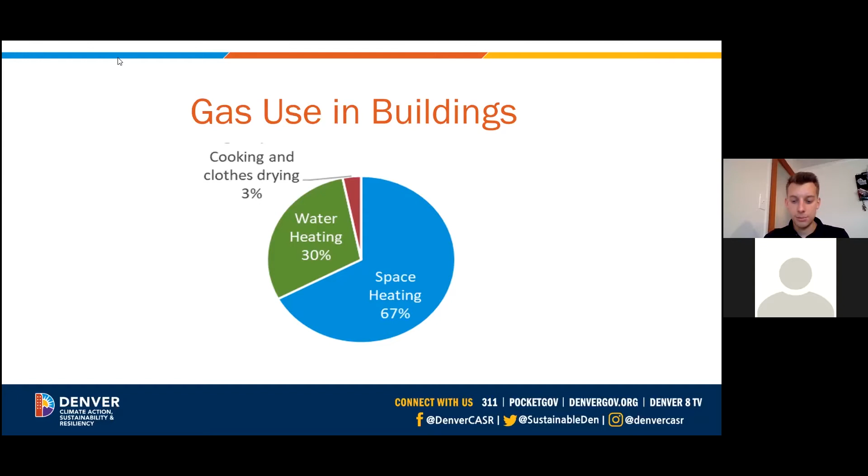When we talk about building electrification, what we found in our plan is actually it's a really high impact climate strategy. First of all, natural gas is actually methane. So methane is the primary component of natural gas, and it's around 80 times more potent than carbon dioxide over like a 20-year time frame. So making meaningful reductions in methane today has really, really high impact climate benefits, especially if we're able to reduce methane leaks throughout distribution and transportation.

And we also found that Xcel Energy has significant goals to decarbonize its electric mix. So currently the grid is around 30% or so renewable, and by 2030, their grid is going to be 80% renewable, and they have a 100% renewable goal by 2050. And Denver is actually looking to further accelerate that timeline. So we have a goal of being 100% renewable city by 2030. So 2030 is well within the lifetime of any heat pump installed today, assuming it can run for 15 or 20 years. It is going to be operating on a primarily renewable powered grid.

And I already see a question or a hand raised. Sorry, was that you, Elizabeth?

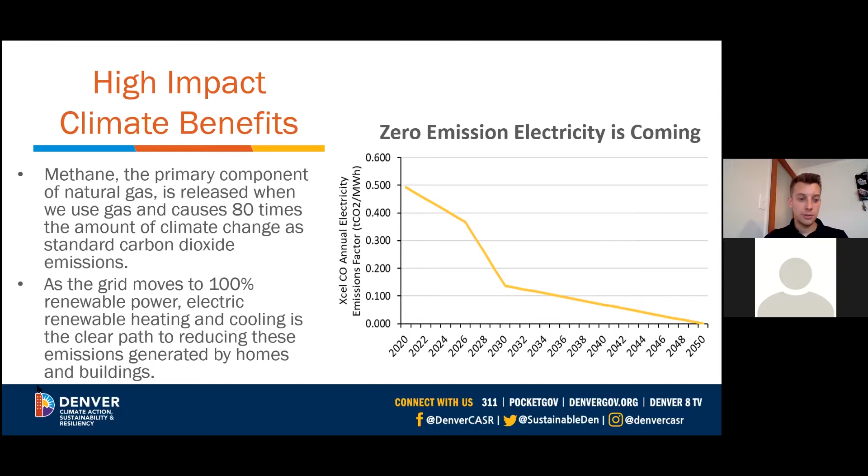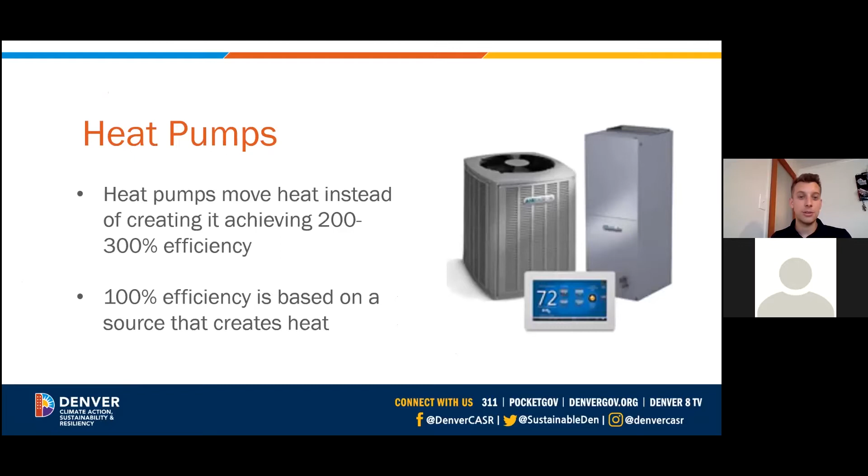And then the third reason that building electrification has such a huge climate benefit is because we're going from something like 90% efficient furnaces and boilers to heat pumps, which are 200 to 300% efficient in our climate zone. And the reason they're able to be more than 100% efficient is not magic. It's because they're moving heat rather than generating it. So rather than burning something or heating something up directly, every unit of energy put into a heat pump is able to effectively move 2 to 3 units of energy for heating needs.

One of our interesting findings pertaining to Denver and likely other communities in Colorado is that not everyone has air conditioning today. We found that approximately 30% of Denver homes do not have air conditioning, and this is likely to be even higher in mountain communities. And we see that our climate is really warming up. We saw that just last week. We had a pretty uncharacteristic heat wave for Colorado, and for Denver, it was around 90 degrees in June. And I think a lot of us, including myself, wish we had cooling. Obviously heat pumps are able to provide both heating and cooling to a space. That's why we're able to leverage that benefit.

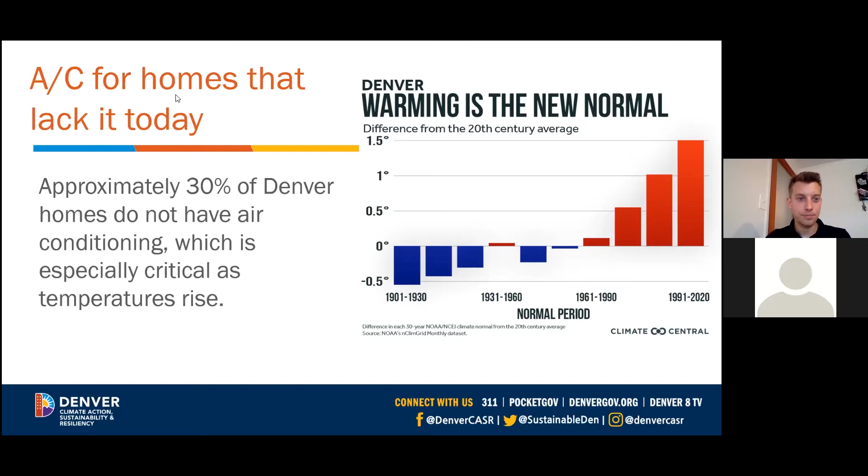There's also significant equity findings in the plan. What we were able to come across is when we've done programs in Denver, around 30% of low-income homes, the gas equipment actually fails carbon monoxide tests. And another data set we just received from the Colorado Energy Office and the Energy Resource Center, which is a local provider of energy efficiency in the income qualified space here locally, found that something like 95% of income qualified homes in Denver do not have carbon monoxide detectors or functional carbon monoxide detectors, and around 40% have excessive carbon monoxide levels. So pretty significant findings, especially when you compare that to some of the much lower rates in market rate homes. So around 5% of gas equipment in market rate homes also fails carbon monoxide tests, but that's at a rate of six times less than low income homes.

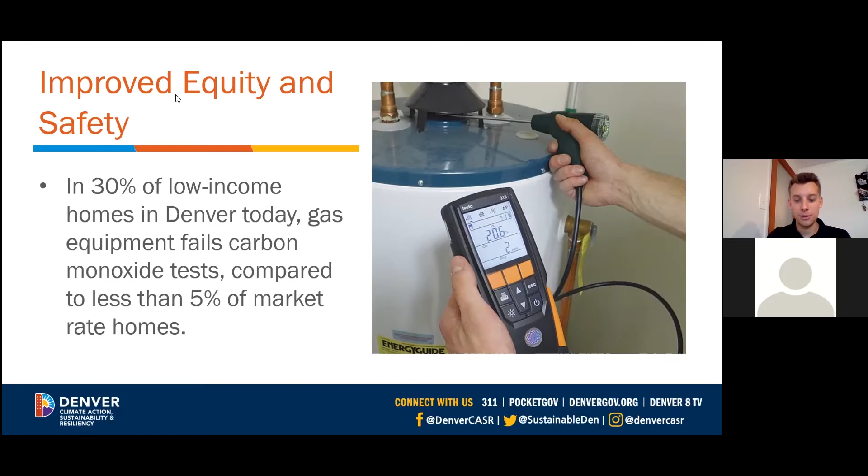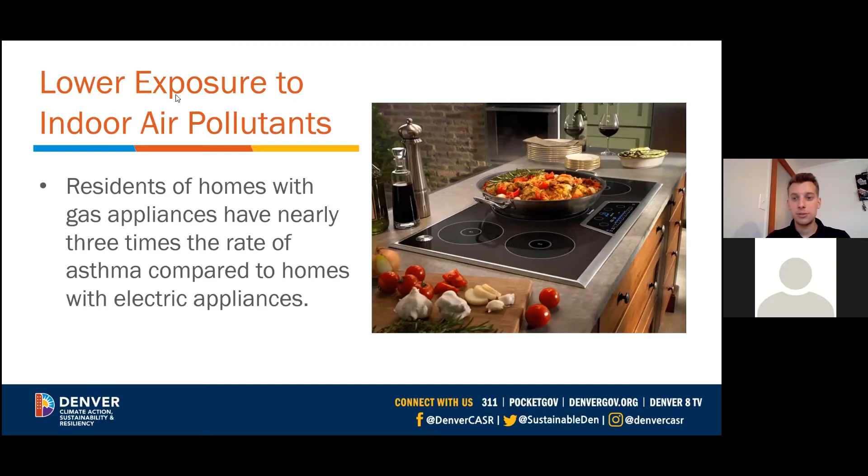There's a growing body of research discussing the negative indoor air quality effects of gas combustion. A number of statistics show residents of homes with gas appliances have nearly 3 times the rate of asthma compared to homes with electric appliances, and kids especially are impacted by homes that use gas stoves for cooking. So while it's not a huge climate benefit for us to address cooking, it is something we want to think about when we want to improve exposure levels or other public health metrics in Denver.

What our analysis really found, and we'll dig into this in detail, is that at end of life, so when a furnace or air conditioning compressor or hot water heater fails, most homes and buildings can replace it with an electric equivalent with a similar cost for both installation and operation as they would pay with a new gas system. So that's really our intervention point, is when a system is already failing and the homeowner or building owner is already looking to replace it with something new. That's when a heat pump can be very, very cost effective.

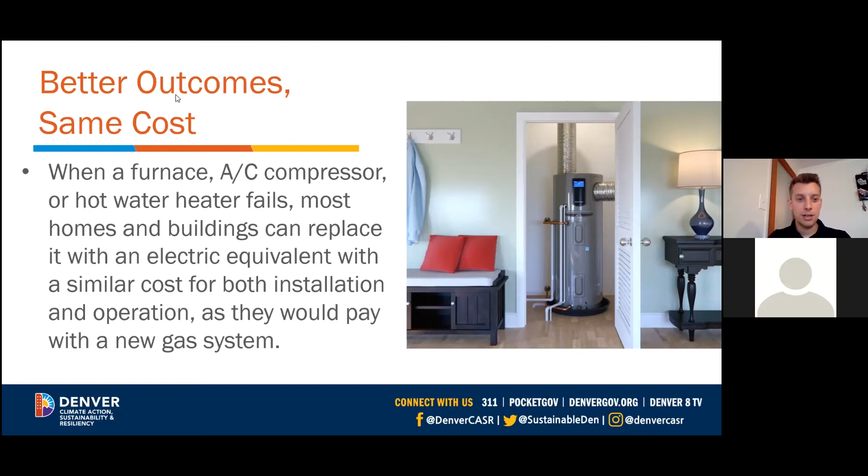We also worked with Xcel Energy to understand the grid impacts of building electrification in Denver. Xcel Energy was able to share some anonymized and aggregated electric feeder level data, as well as some gas data and data around our downtown steam system. So layering all that over to understand what happens when we electrify residential buildings, multifamily buildings, downtown offices. What does that do to our electric system? And what we found is that the grid today is actually built out to withstand such a high air conditioning load that we have a really long runway before the winter peak starts to look like the summer peak. And winter heating needs today can very easily shift to being powered by renewable electricity.

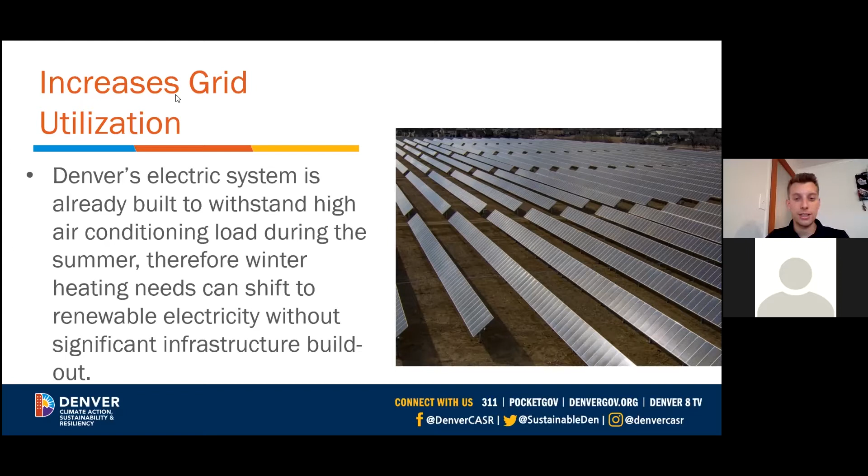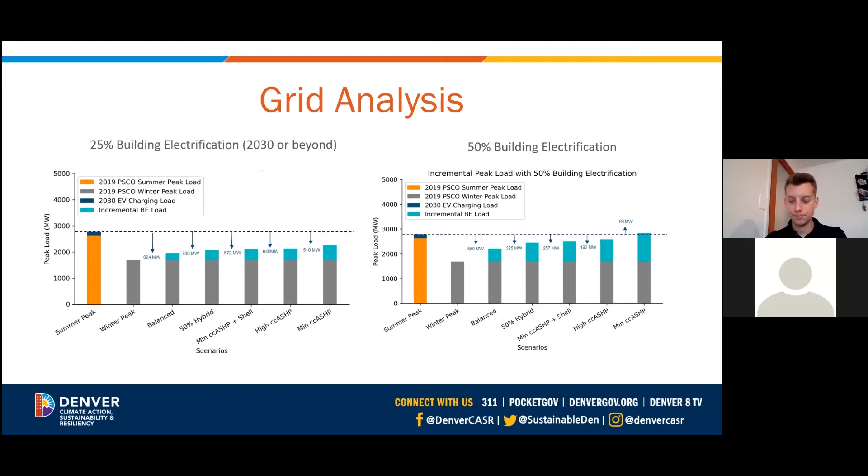When we talk about heat pumps, they're really not that new. They can seem very new to us, but they've been used in our refrigerators since the 1800s. So pretty established technology. And for space and water heating, they've been used in Asia and Europe for decades now and are extremely common there, things like VRF systems and ductless heat pumps as well.

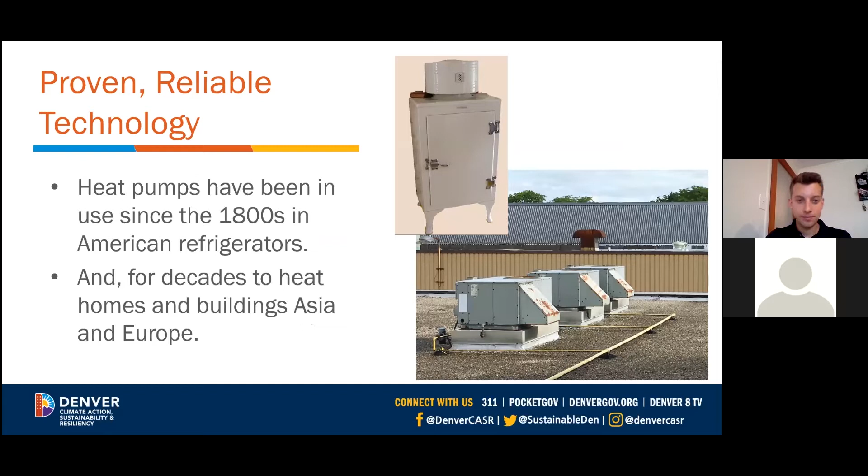Finally, what we found in our plan is that this is really Denver's opportunity to lead. A lot of cities, businesses, states and countries are looking to transition their energy uses away from fossil fuels and towards renewable technology. By addressing this now, Denver is really in a position where we can lead and be thoughtful about the policy and deliver all the benefits we want to with heat pumps in an equitable manner. That way we don't have to play catch up later and do early replacement programs. By being proactive now, we're able to be really successful going forward.

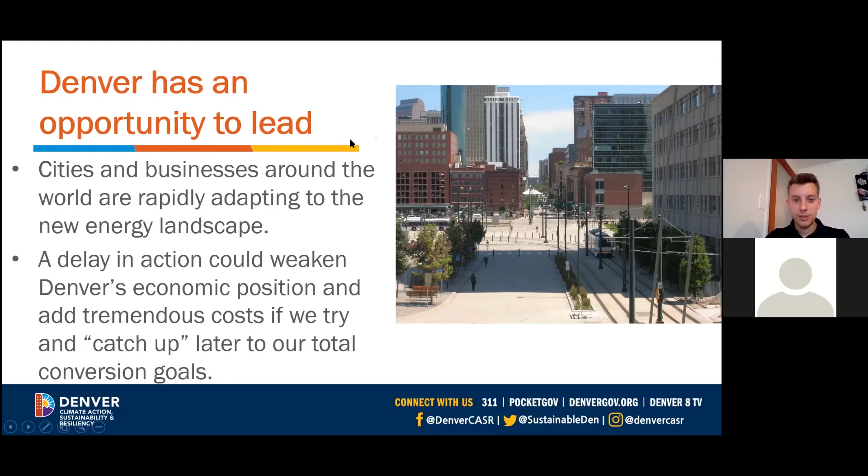One of the things we looked at in our plan was also trying to understand how building electrification compares to other options to decarbonize our fossil gas emissions. So the question often comes up, why do we electrify? Why don't we just decarbonize what's in the pipeline? There are a number of options to do that.

The first is biogas. The idea there is we're reclaiming methane from things like landfills, manure fields, coal beds, anaerobic digesters at wastewater treatment plants. While that is a really good climate strategy because we're claiming some of that fugitive methane and doing something useful with it, the challenge is that locally in Colorado, estimates say we could probably only meet around 5 to 10% of the natural gas supply with biogas.

The second option is hydrogen. This is the idea where we're creating green hydrogen, hopefully using excess renewables on the grid, and putting that into the pipeline to be blended with the methane there. Studies have established that we can mix around up to 7% of the pipeline mix before we start having issues. Much above that, and we might have to start replacing pipes because hydrogen molecules are much smaller than methane molecules, so they might leak out of pipe junctions. And we might have to change out the actual appliances. Furnaces, boilers, and stoves are all not really designed to combust hydrogen currently.

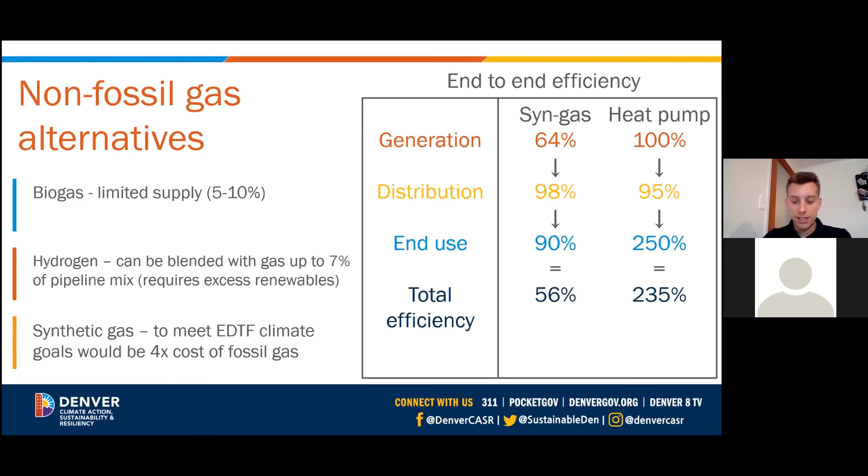I'll dive into the electrification typologies, which is the techno-economic analysis component of the plan. But first, I just want to go over some key considerations.

The second key consideration we found is that avoiding electric resistance can save both on capital and operating costs, and this is really important to keep in mind. From the capital cost perspective, if we install a heat pump with electric resistance units, it's possible that electrical upgrades are triggered at that building or home, and those can be very expensive. On operating costs, avoiding electric resistance as much as possible is really key to making the numbers work.

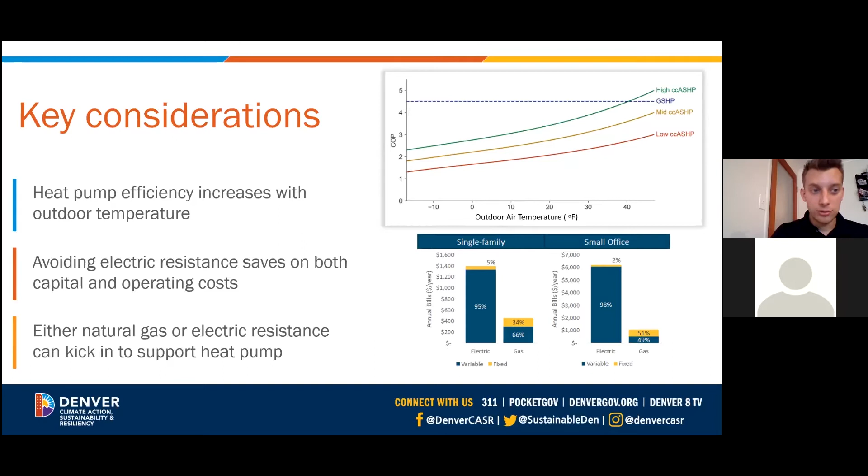That dynamic is very different on the gas bills. Around half the bill is how much a small office would pay to get gas delivered, dollars per therm delivered, and half is how much they pay to be connected to the gas system monthly. It's similar for single family homes—we pay around $12 a month to be connected to the gas system, and in commercial spaces it's around $45 a month, regardless of the size of the space. That's why we see instances where full electrification has really good operating costs, because we're assuming we're able to fully electrify the building and remove that gas fixed charge of being connected to the gas system.

With that, I'll jump into space heating.

We found that four space heating typologies represent around 70% of commercial multifamily buildings in Denver, and a significant amount of residential space as well. Typology one is just a standard furnace system. The second typology is rooftop units. The third is packaged terminal air conditioning units. And the fourth is boilers.

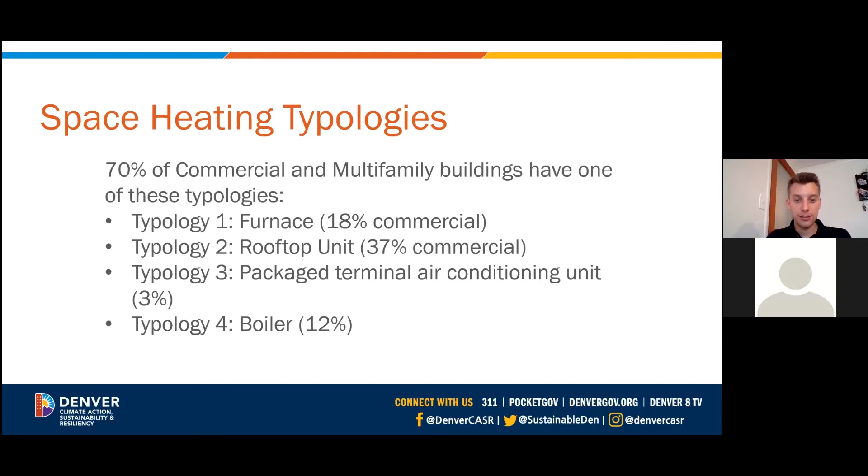The first typology is furnaces—this is probably what we're most familiar with, what we're likely to have at our home. There are a number of options to fully or partially electrify these systems. Full electrification can be done with both ducted and ductless systems. The graphic on the left is a ductless system where there's no ducts, just an outdoor unit and an indoor unit with refrigerant piping in between. The outdoor unit is able to find heat in the air, just like your refrigerator, down to some very cold temperatures, and bring that inside to the refrigerant and disperse it in the space.

Full electrification would involve using an electric resistance unit of some sort for backup heating needs. Partial electrification would be if you retain your existing fossil fuel system for those few hours of the year where it's very cold—that could be a hydronic baseboard, or it could be a forced air furnace as well.

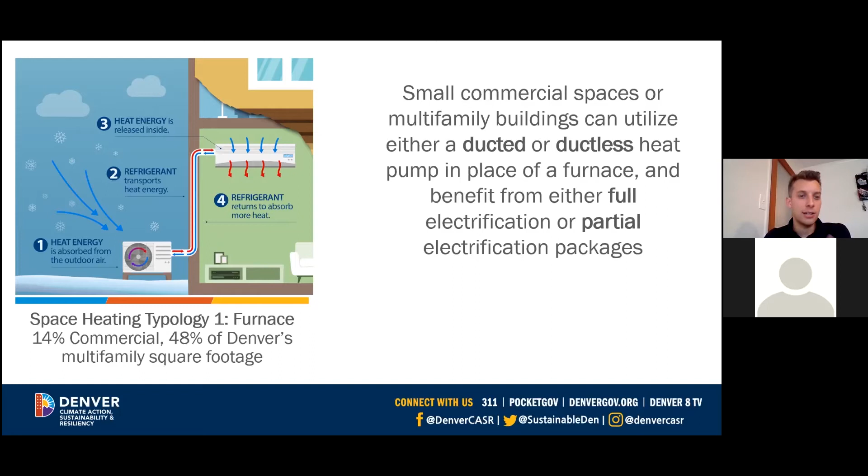Ducted systems are similar to the image on the left, where you have an outdoor unit and an indoor unit, but the indoor unit disperses that heat through your ducts, utilizing that existing infrastructure. Ducted systems tend to be a little less efficient, just because you have higher fan power and might have some losses through the ducts.

However, energy bills stay about the same. This is due to the fact that we're able to really make the most of that heat pump efficiency when it's milder out, above 20 degrees Fahrenheit, and below that make use of the really cost-effective gas right now.

Using a temperature change point around 20 degrees Fahrenheit gives us around a 70% gas reduction for space heating for that site. So pretty significant, given we're not making any impacts to energy bills. We're addressing a lot of emissions right there.

The mini split or ductless system is able to utilize a slightly lower temperature, around 15 degrees Fahrenheit, and the installation costs are at cost parity to a gas system or a little bit higher. We do see energy bill reductions because ductless systems can be that much more efficient. And because we're using a lower temperature set point of 15 degrees versus 20, we're able to address around 82% of the gas reduction or of the gas used on site.

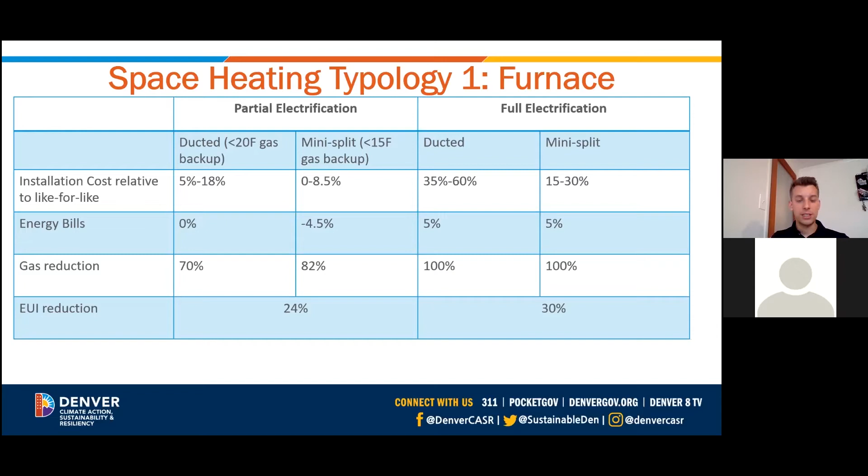The second space heating typology is rooftop units. This is something really common in medium-sized commercial spaces throughout Denver. And luckily for us, manufacturers have an off-the-shelf option that can do both full and partial electrification. The partial electrification option is a heat pump-based unit that has a small gas furnace that can kick in to support that heat pump if needed. And the full electrification option would have a heat pump and some electric resistance units in there as well.

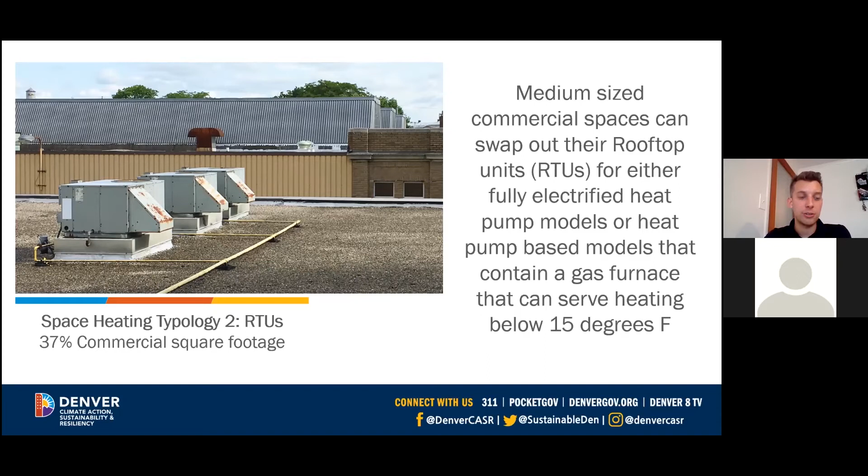For rooftop units, we see really great economics on partial electrification. They can cost about the same or up to around 12% more. And we're able to keep energy bills the same on an annual basis. We're able to address around 81% of gas use for space heating at that site, assuming a 15 Fahrenheit switch point. And again, an EUI reduction of around 24%.

Full electrification, this is where we see some more expenses compared to a one-for-one gas project, something like 50 to 72% higher. We do see energy bills go down, and that's because with full electrification, we're able to avoid that gas fixed charge, like the charge to be connected to the gas system, and therefore lower operating costs that much. Again, with full electrification, we're always addressing 100% of gas used for that space heating or water heating type. And the EUI reduction, again, gets a little bit of a bump, 30%. So pretty significant. And that's due to how many heating hours we have in Denver.

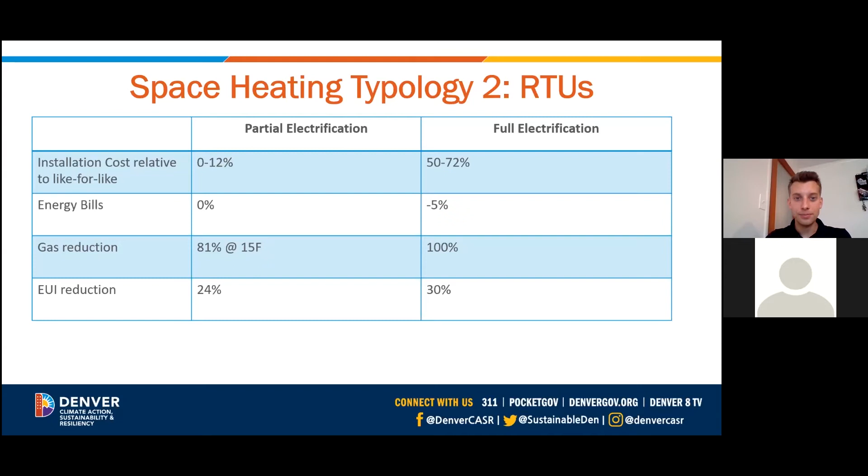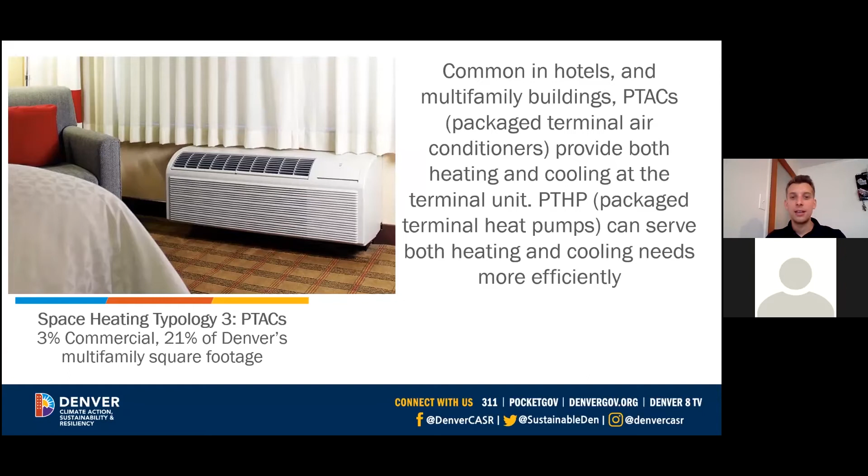The third space heating typology is packaged terminal air conditioner units. So you're probably familiar with these. You've probably seen them in hotels. And they can provide both heating and cooling to a space.

For PTACs, we looked at both partial and full electrification, and we see some bigger impacts around installation costs. This isn't always the case. It can be done cost effectively, but we found on average it may be a more complex project. For partial electrification, we do see energy bills go down, and for full electrification, we see them go up just because that electric resistance unit has to run.

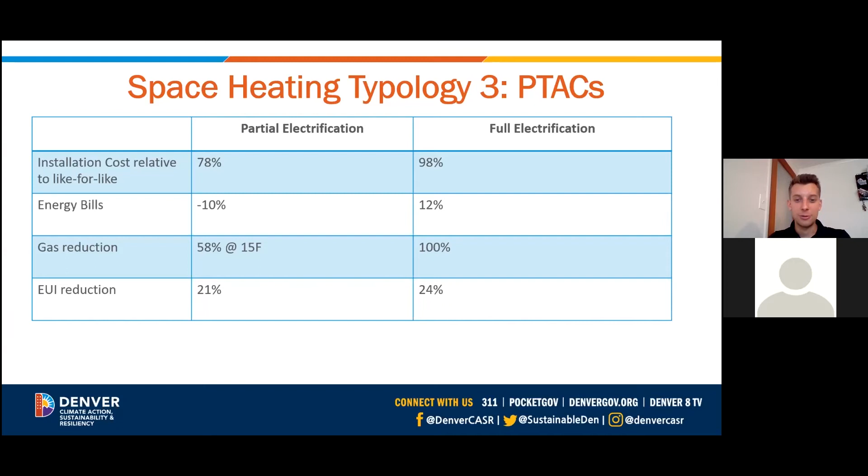With partial electrification, we're able to address around 58% of gas use on site, assuming a 15 Fahrenheit temperature switch point. And with full electrification, we're able to address 100% of gas used on site. EUI reductions are a little bit more modest, but still pretty significant: 21% reduction for partial electrification and 24% for full electrification.

Finally, boilers. This is really what we would see in some of our largest commercial buildings where they have a dedicated mechanical penthouse with a chiller and boiler. And the options there are really to replace the boiler with an electric boiler. And that can prove a little bit costly, as you'll see.

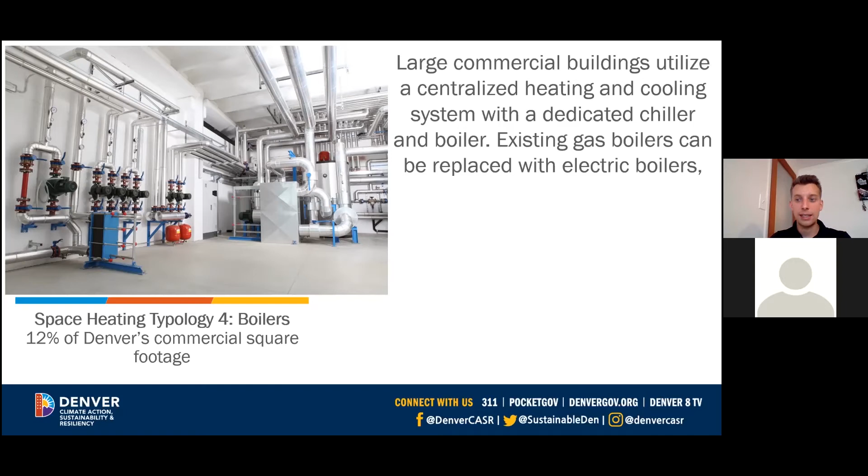For boilers, we only model full electrification. There are partial electrification options for large commercial buildings, but our team didn't feel comfortable modeling that today.

The installation costs are around 66% higher compared to a one-for-one gas project, and we see a decent bump in energy bills, around 19% increase. A lot of that is because we're departing from heat pump technology here, with all its efficiencies of 200 to 300%, and instead utilizing a lot more electric resistance.

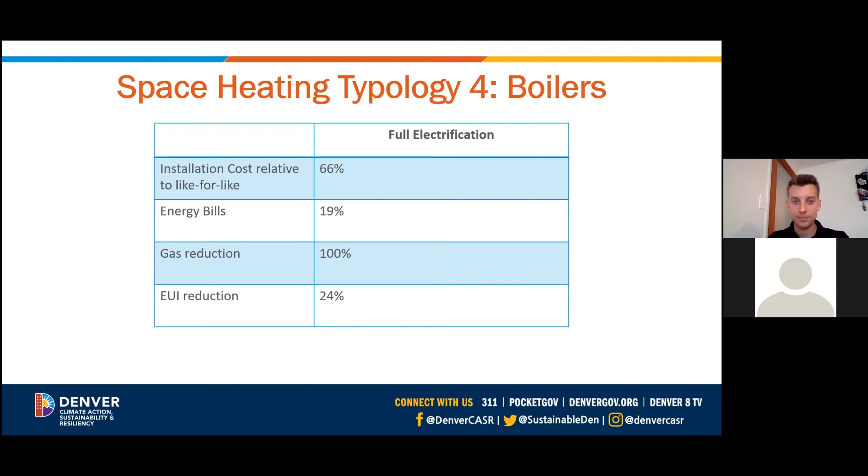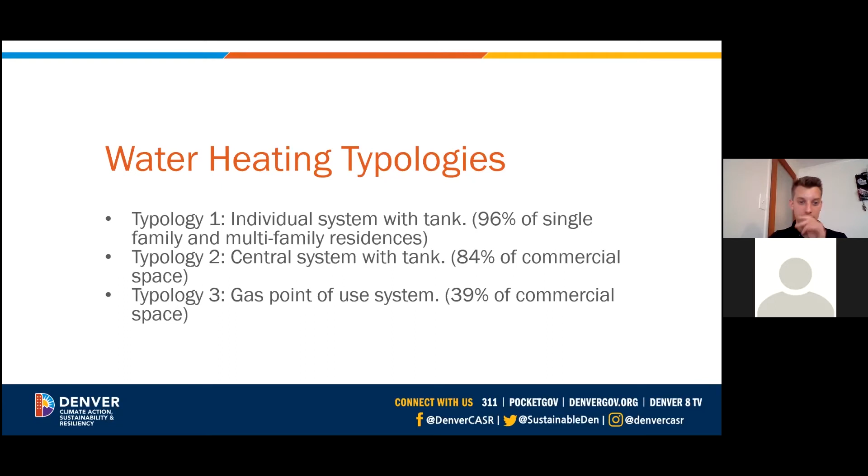For heating needs, with full electrification we always see 100% gas reduction and an EUI reduction of around 24%. Moving on to water heating, we have 3 water heating typologies. The first is individual system with tanks, very common in most of our homes. The second is central system with tanks, more common in commercial spaces. And the third is a gas point of use system.

The first water heating typology is just an individual system with a tank. This is where you currently probably have a small gas furnace and a storage tank that serves your home's or small commercial space's water heating needs.

Manufacturers now have heat pump water heaters, which do a very similar thing. There's a heat pump in there that's able to extract heat from the ambient air and put it into your water for domestic hot water needs.

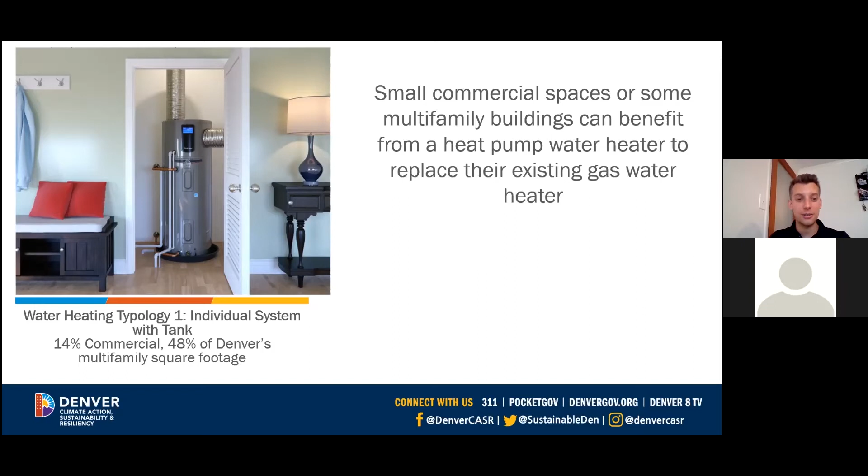One thing to keep in mind is, where do you want to vent that cold air to? In the summertime, you might want it going into your house, but in the wintertime, you might want to exhaust it outside your house or building.

What we found with heat pump water heaters is the installation cost can be at cost parity, so it can cost exactly the same as a gas option, or it can be higher. A lot of that is driven by space constraints or electrical system constraints.

Historically, a lot of heat pump water heaters were 240 volt, so if a contractor had to install that 240 volt outlet, that could be a cost increase. But we are seeing more and more manufacturers come to market with a 120 volt plug and play option, which is a pretty significant technology advancement in that space.

Minor impact to energy bills, around 1%. And for all water heating typologies, we only looked at full electrification, so the gas reduction is always 100%.

The second water heating typology is central systems with tanks. This is something we'd see in commercial buildings, say, and the idea there is to utilize, again, a heat pump water heater to serve as much of the water heating load as possible.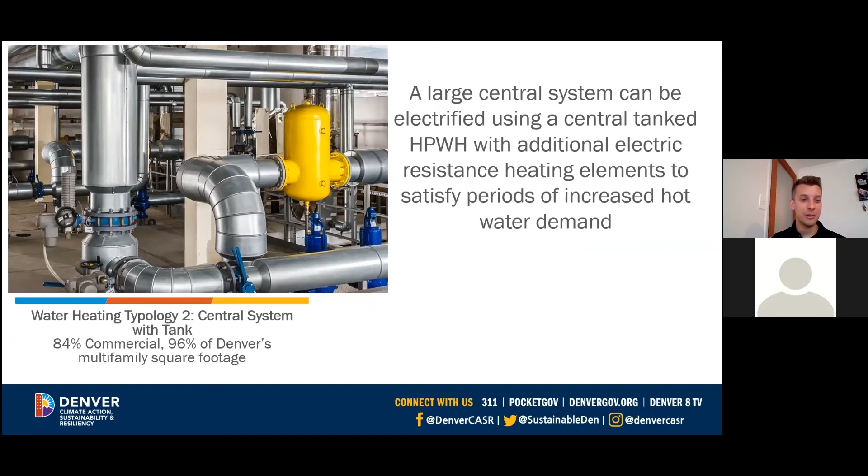But in some instances of really high demand, you might have to utilize electric resistance water heating. The economics of this option are really highly dependent on how much storage you can site in your mechanical space. If you're able to do a lot of storage, you can utilize that heat pump for all or a lot of your water heating needs. If not, you're utilizing the electric resistance a lot more.

What we found is the installation costs are around 7 to 20% higher for us compared to a 1-for-1 gas project. And there's a slight increase in energy bills as well, around 4%, due to some of the electric resistance running.

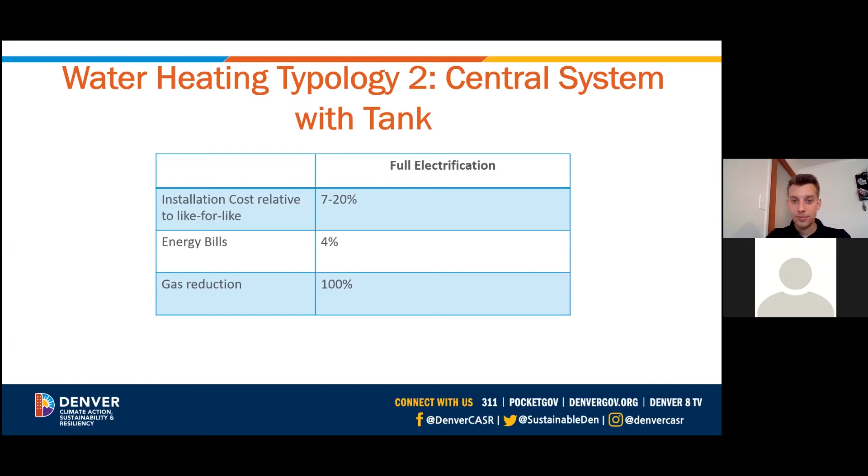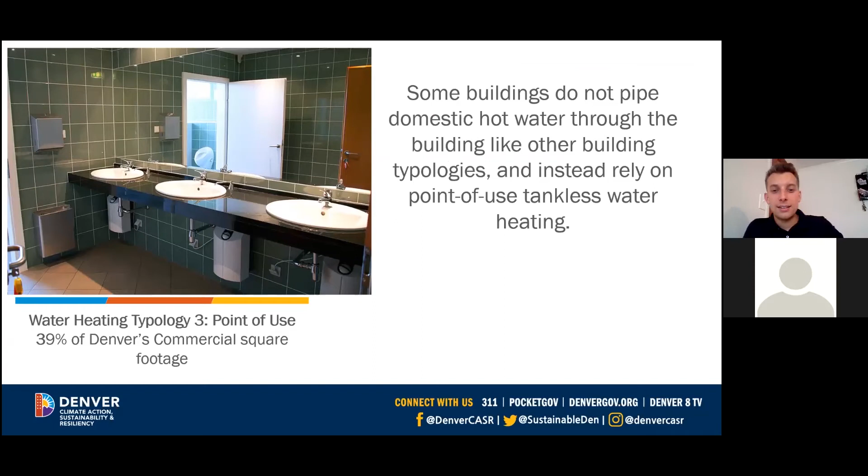And then the third typology is point of use. You might see these in some commercial bathrooms, and these are often already electric, as you can see in the image on the left. But in the instances that they are gas, our team wanted to understand the implications of electrifying those.

We found the installation costs can be a little bit higher, 30 to 45% above just a 1-for-1 gas project. And there is again an impact to energy bills, 5%, because these are primarily electric resistance - there isn't really space for a heat pump unit there. Again, with full electrification, we're able to address 100% of the gas use for water heating by that typology.

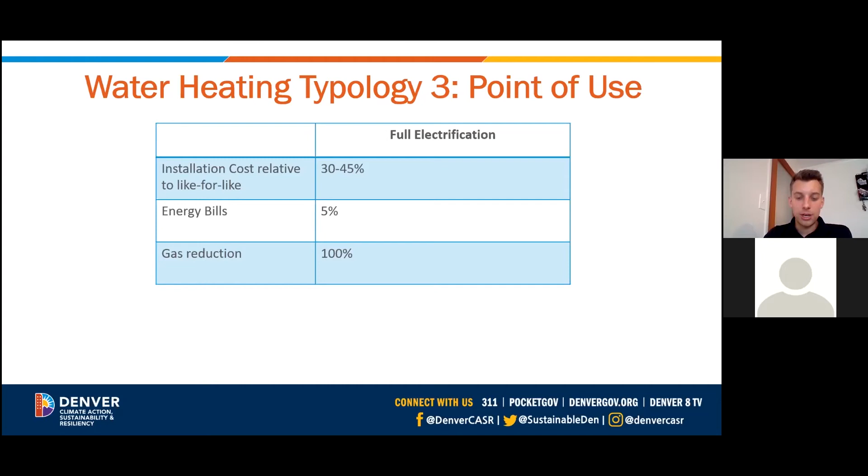The final section of our plan is talking about some of the solutions that we feel Denver should prioritize in order to advance heat pump adoption and the adoption of renewable heating and cooling practices. They fall into a number of different categories, the first being messaging solutions.

We know that there is a need out there - most homeowners, even some contractors and commercial and multifamily building owners are likely not aware of their electrification options today. So the question was, what can we do about that? Can Denver create a website? Should we be creating outreach materials? How should we promote that? One thing we heard from our stakeholders is that public outreach materials need to be really hyper-focused and culturally appropriate, since not everyone resonates to the same messages.

So it's important to keep in mind what a landlord versus a tenant versus a homeowner might want to hear around their options for reducing their heating emissions. And then who are the partners that we should be working with? We know there's a lot of different groups working on this. How can we partner with them to really create materials and promote that with them?

The second set of solutions is our partnership solutions. We found that Xcel Energy, being both our electric and gas provider, is a huge partner in this transition. So we already work with them through an Energy Future Collaboration Network, but it's important for us to prioritize how to continue to advance renewable heating and cooling adoption.

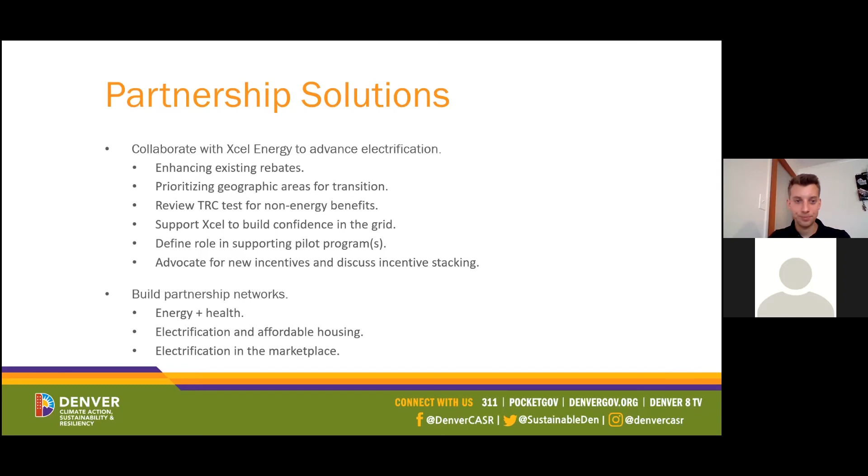The third category of solutions is program solutions. The first is thinking about demonstration projects in key neighborhoods, thinking about equity first, some of that affordable housing, how to electrify that, and steam loop buildings. There are around 120 steam buildings downtown on the district steam system.

Steam is actually a very expensive fuel right now. So we know some are looking to maybe switch their heating needs, and we want to ensure that is, as often as possible, electrification with heat pump technologies.

Denver owned buildings is another area where we might have impact, looking at all the real estate we own in Denver: offices, fire stations, libraries, etc.

Looking at older buildings, think about historic buildings and their unique needs and challenges around electrification, but also opportunities. A lot of them are less likely to have cooling, so they might benefit from a heat pump system that's able to provide cooling and look a lot better than the current window air conditioner unit they have now. Newer buildings, to an extent, are more efficient, built on newer, better building codes, so electrification economics might look best right there.

And then developing technical assistance programs, thinking about which of our technical stakeholders really need support. Do we need a dedicated web page for contractors, distributors, engineers, etc.?

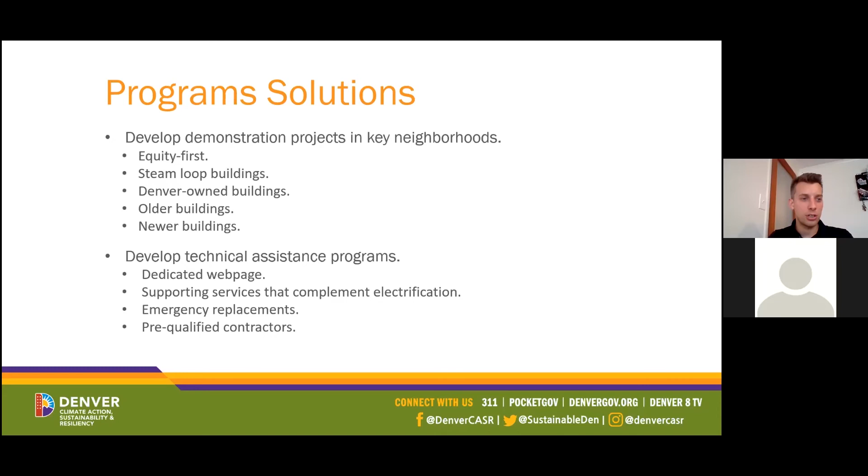Policy solutions include a number of things that we can do internally in Denver. One is really elevating equitable housing through electrification policies and programs, and ensuring that those communities are seeing the benefits of heat pumps soon.

Providing quick permits for the electrification process. Currently it's a little bit more complicated to permit a heat pump project than a one-for-one gas project. How can we even that playing field and provide incentives, monetary or non-monetary, for heat pump installations? Developing and adopting new code language to encourage electrification.

You'll notice this plan was really focused on existing building electrification, but we have a lot of efforts underway to do similar work in new buildings.

Formally incorporating avoided cost valuation into energy programs and policymaking, and thinking about how to really understand the benefits of electrification through that. And then supporting and advocating for state level policies and regulations to advance electrification.

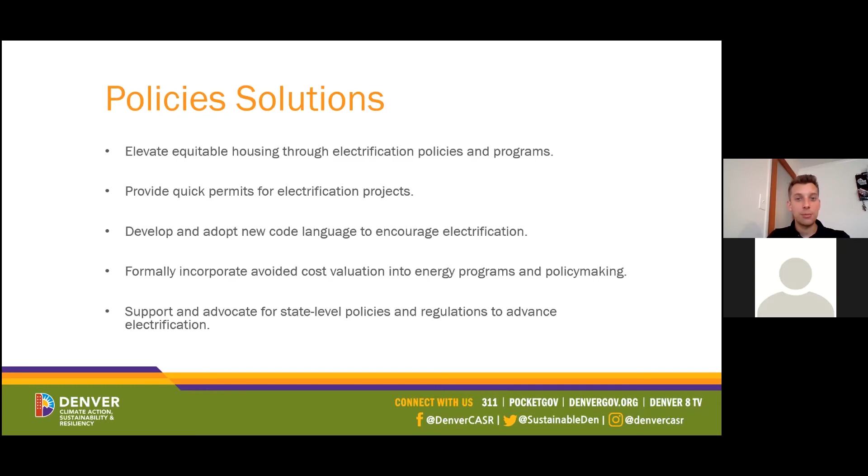We saw a number of bills go through the legislature this past session that included language around building electrification. And there's a lot of activity happening at the Public Utilities Commission as well that involves building electrification.

And then finally, funding and financing solutions. We work with our stakeholders to help understand which of these are really the priority.

Is it Denver providing supplemental incentives, or is it really collaborating with Xcel to expand their offerings? If that's like a one-stop shop, really trusted resource for incentives and rebates, how can we expand that offering?

Designing no interest financing options, specifically ones that do not require credit approval. We know that credit constrained customers especially are struggling to find fair financing options.

Phasing in different incentive levels and types, maybe based on efficiency, and then focusing incentives on higher efficiency systems. Looking at the grid impacts, how can we really ensure that a lot of what's going in today is some of the higher efficiency cold climate systems, and that's where we're likely to see really good operating economic impacts as well.

Reallocating gas efficiency funds to support building envelope improvements. Gas efficiency programs are still happening, but how can we think about investing those dollars in technologies that are not going away, such as weatherization and larger envelope upgrades.

Considering incentives for dual fuel systems and gas supplemental heat. That's where we saw some of the best economics, in the partial electrification scenarios. So how should our incentives really address that in the short and medium term?

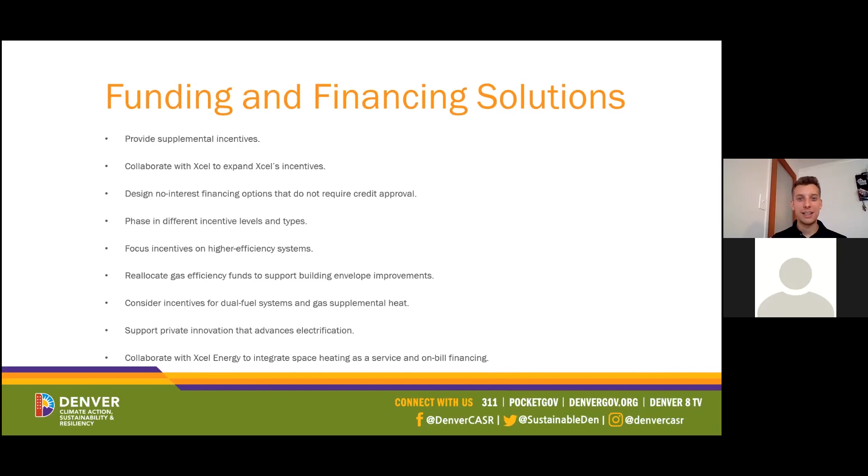So that really concludes my presentation.